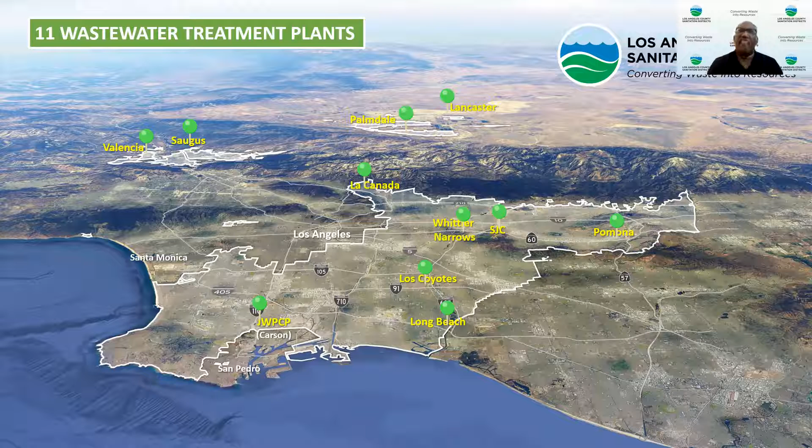And the two, Lancaster and Palmdale, are in the Antelope Valley, and they present unique challenges. There's the Palmdale plant that will be the focus of today's tour, and they present unique challenges, based on that they're in a closed basin. Of our 11 wastewater treatment plants, 9 of them, when they're done cleaning their water, if it's not reused, they have a river body, they have a water body, either a river or an ocean that they can discharge to.

The two plants in the Antelope Valley are located at Lancaster and Palmdale. If you look at this aerial shot, you can see the contours of the mountains. All the water from these two treatment plants flows to the northeast towards Edwards Air Force Base, and there's no river, there's no ocean there. So every drop that comes into those treatment plants, unlike the other nine we have further south in LA County, we have to manage on land.

For example, if we have water at our Los Coyotes plant, there's Whittier Narrows, a water body close by, so we can put the water there. But with Lancaster and Palmdale, every drop that comes in, we have to manage it on land. That makes for a unique challenge.

So even in the winter months, where it may be raining and reuse isn't as high, we have to have some place where that water can be properly stored and managed.

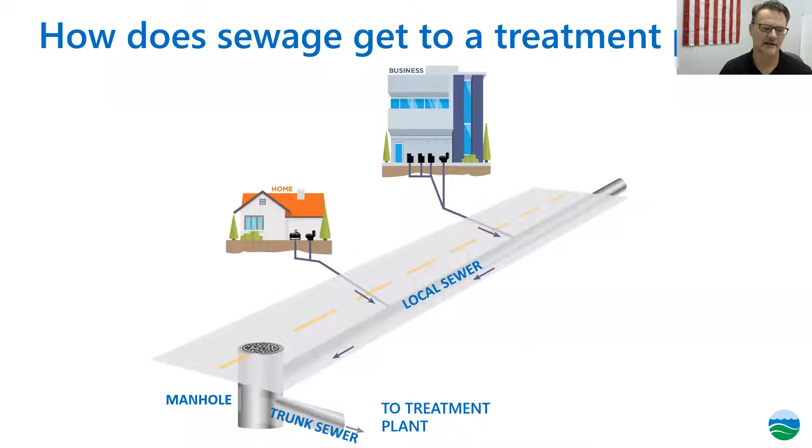The Palmdale Water Reclamation Plant was formed in 1953 and first started treating 0.75 MGD of flow, with about 4,000 customers at that time. To give you an idea what an MGD is, it stands for one million gallons per day. Think about 140 garden hoses flowing at once - that's a single MGD. Today, the Palmdale Water Reclamation Plant treats an average of about 10 MGD a day.

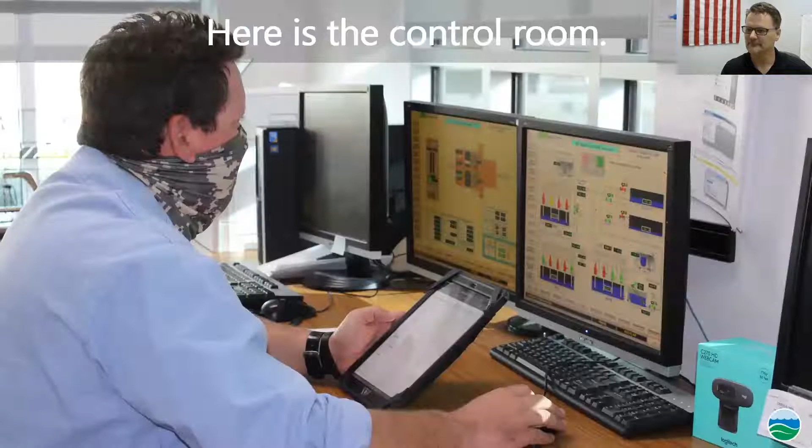Of course we had to have several upgrades throughout the years to get to this point. As you saw in the video, the plant is somewhat isolated off by itself, which is nice, and you can get an overview of the plant. In this picture here, you can see an operator looking at a couple of screens in our operations control room.

On those screens, you see different colors, green and red. This system is a DCS system, which stands for Distributed Control System. An operator can control pumps, valves, and processes just by clicking and changing things.

Jumping back to the colors on the screen, a green color means it's on - so if it's a pump, it's on, or if it's a valve, it's open. If it's red, that means the pump is off or the valve is closed.

This information helps as a cost savings approach, because now an operator can sit and control many different functions across the plant just from this one location. That doesn't mean an operator doesn't have to go out into the plant and observe and make adjustments - that does occur, but this helps with the control of the plant itself.

In his hand you can see an iPad, which is what we use for what we call electronic rounds keeping. Every day an operator will go into the plant and walk around on a prescribed route, recording information as they go through the plant.

This information tells the operator if something's changed - maybe a temperature of a particular pump has increased, giving an indication that there may be a failure on the horizon. If that's the case, we get maintenance involved and they repair it. It's a way of maintaining the plant to keep it working optimally.

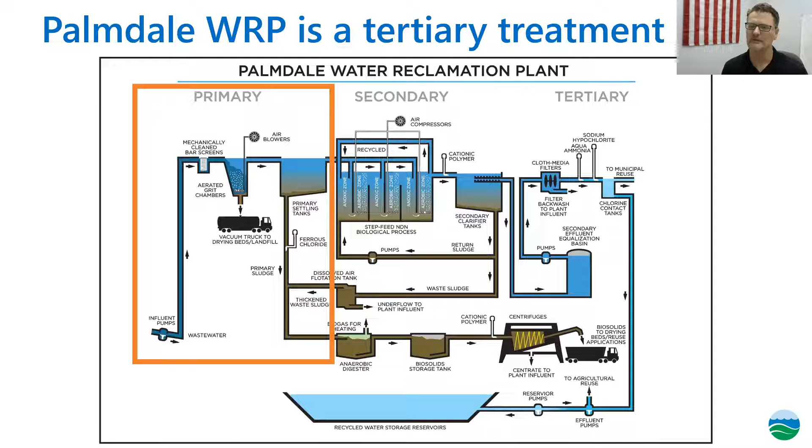Because we convey it via gravity, the pipes have to slope downward towards the plant so the water will flow downhill. The water enters the plant at about 30 feet below grade, and then we pump it above grade and start the treatment process.

The Palmdale Water Reclamation Plant processes an average of 10 mgd of flow, and we have 5 pumps even though each can flow 10 mgd - this is for redundancy reasons. That way, if a pump goes out, we can just pull it out and continue operations without any problems.

You'll see throughout the plant that we have these redundant systems, so if we have to do maintenance work or something breaks, we have redundancy to continue to treat and manage the systems.

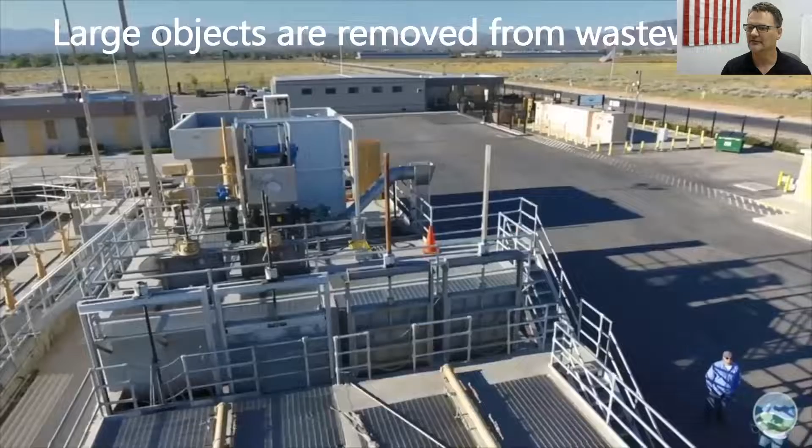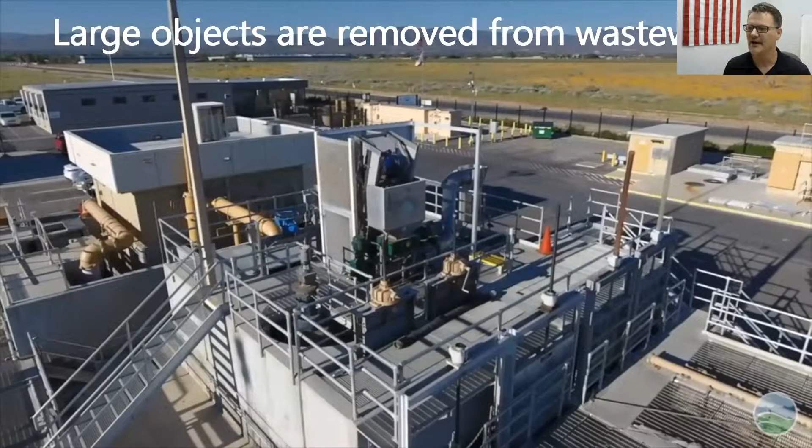Next is the screen structure. The water is pumped up to the screening structure, and this is the first step of physical separation. Anything over about 1 inch in diameter is separated out, and we start removing these through this flex rake system.

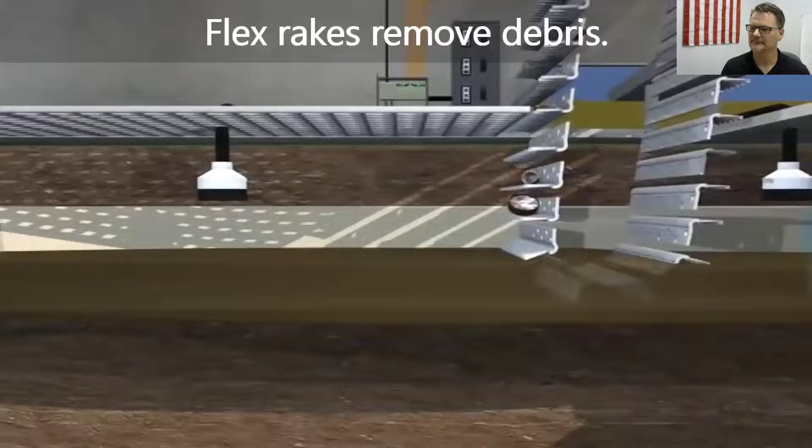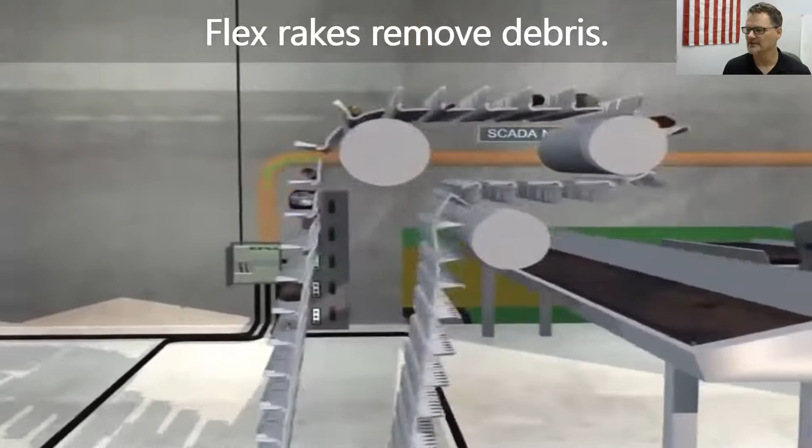Here's a graphic showing what it looks like from the side view. You can see the debris flowing from left to right on the screen. The screen catches it, brings it up, and in this graphic drops it onto a conveyor belt. Here at Palmdale we actually drop it into a washer compactor, which washes it down, grinds it up, and pushes it out to the side.

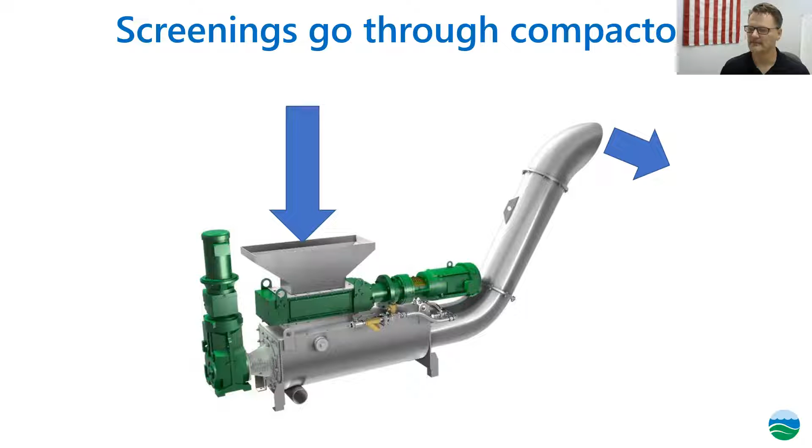So what happens with these flushable wipes, because they don't break down, is that they come into our influent pumps, they clog up our pumps, and then we got to pull these pumps out and rebuild them. So that's an extra cost on the plant itself. So if you have any flushable wipes, the best way to dispose of them is to throw them away. Maybe you have a baby at home and you're changing diapers. We all like to use the flushable wipes with the baby diapers to clean the baby because it works real well. Maybe throw it into, I think they have diaper genies now that you can throw it into. So that's how you want to dispose of them. You don't want to flush them down.

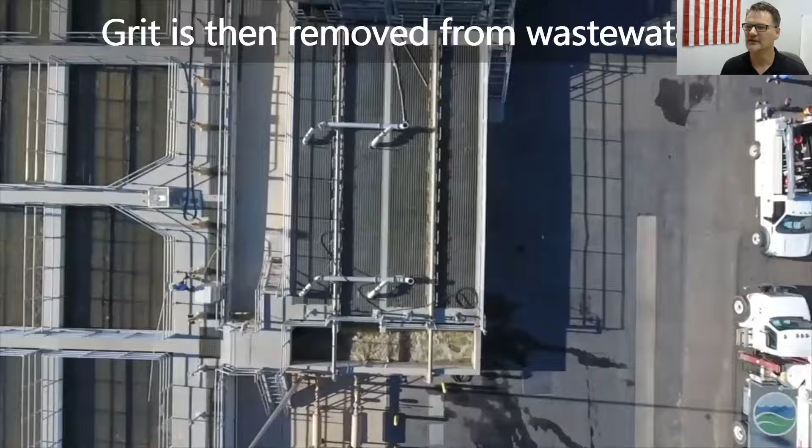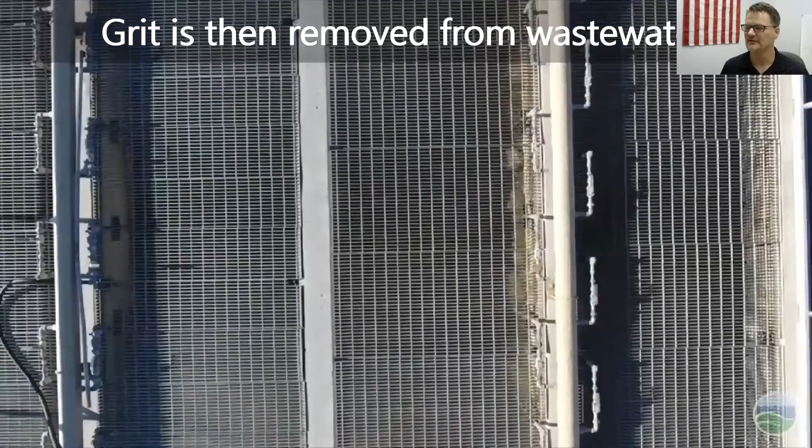All right, so we'll go ahead and move on with the tour. Next is our grit chamber. The purpose of the grit chamber is to remove exactly what it says. We want to remove grit. We want to remove these smaller, heavier objects, eggshells also. The reason why we remove these items is because we want to protect downstream equipment. The analogy I like to use is like, if you have a bicycle and a bicycle chain, you don't put sand in your bicycle chain because that will wear out your chain and sprocket. Just like we want to protect our chain and sprocket while we ride our bikes, we want to protect our equipment here at the plant. So we want to remove all that grit earlier on in the process if possible.

Also, I want to point out, if you look at the water here, it's very dark, and sometimes I hear the word yucky when we do the physical tours. I want to point out that it's not the water that's bad, it's what's in the water that's bad. These processes are designed to remove what's in the water so that we can recover the water and use that valuable resource in other areas or for beneficial reuse. So it's not the water that's bad, it's what's in the water. Once we remove what's bad in the water, we have good water remaining. And we're going to show you that at the end of the tour.

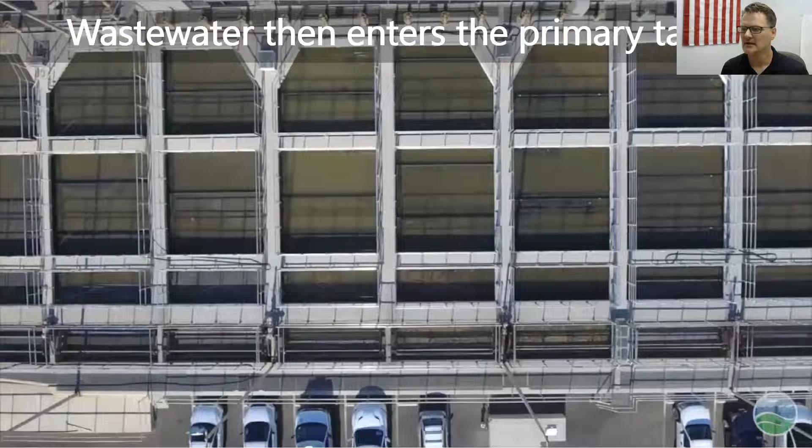All right, here's a video of the primary settling tanks. The purpose of the primary settling tanks is, again, physical separation. It's to remove anything that may float and anything that may sink in the tank itself. Looking on the top of the tanks, you can see these boards here. These boards slowly go across the water and collect everything that floats in the tank. These boards also go underneath the tank and collect everything that settles. Everything collected on top and on the bottom is then pumped to the digesters, which we're going to show you in this tour as well. Now this water slows way down, to allow opportunity for these items to float and sink so we can remove them.

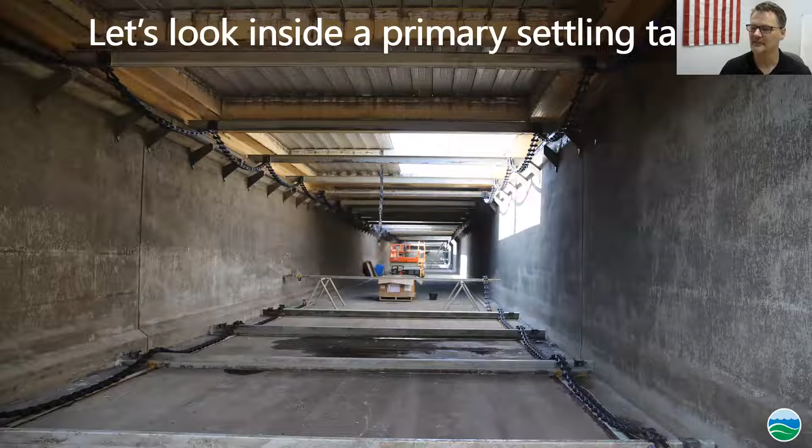And so this is what it looks like inside the primary settling tanks. On the bottom here, you can see the chain and flight system, these boards, and on the top also you can see them. They just kind of rotate around and collect this material.

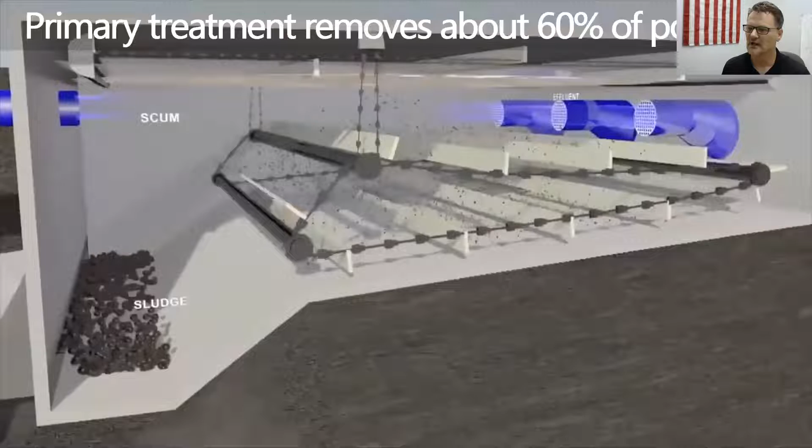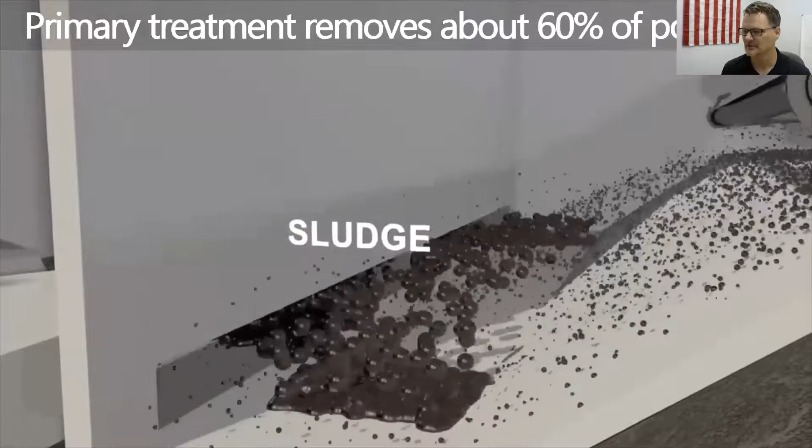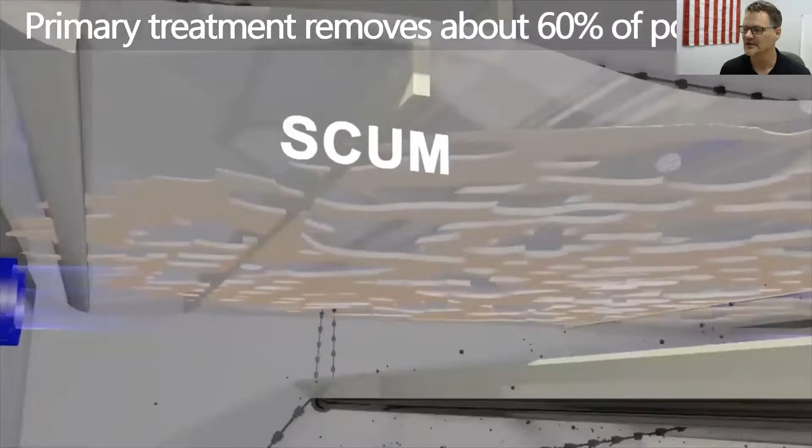And here's a graphic of the primary settling tanks. On the left-hand side, you see where sludge is collected on the bottom. Sludge is a term we use for all the material that we collect that floats and that sinks, or actually scum, I think, is what we use on the top. And so this material is then transported to the digesters for further processing.

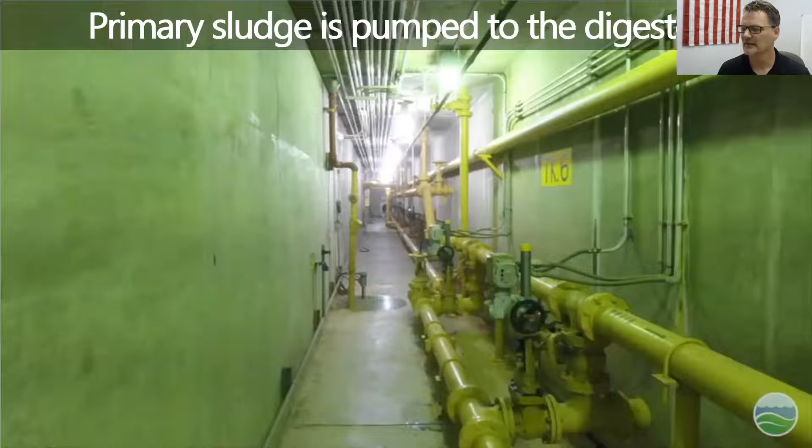Here's a picture of our primary galleries. On the right-hand side, you can see tank 6 here, that's settling tank number 6 that's been identified. We have some pipes here that go into the wall itself. These pipes that go into the wall are actually at the bottom of the hoppers in the primary tanks, and they're collecting that material, which is then being pumped and transported to the digesters.

Okay, now that we finished the primary portion of the system, we're going to move on to the secondary system. Genesis, any questions that popped up when we were going through the primary systems?

Just if it operates 24/7? Oh yeah, yes, excellent question. Yes, the plant operates 24/7. So there's always wastewater that comes into the plant, and this flow does kind of vary a little bit. It goes up, it goes down. So you can imagine at night when everybody's sleeping, the flow goes down, and in the morning when everybody gets up and starts cooking, taking showers, the flow kind of goes up. During the day when everybody's at work, the flow goes down, and then when everybody comes home from work, the flow goes back up again. So you just see this diurnal movement throughout the day based off of human activity.

Now I'll throw this question out to the audience. What do you think our busiest day is, the most flow that we will see at the plant? What day of the year do you think that is? Does anybody want to take a guess? I'm looking at the chats. Someone, Ashley, says the Super Bowl during halftime. Someone else says New Year's Day. Someone says 4th of July.

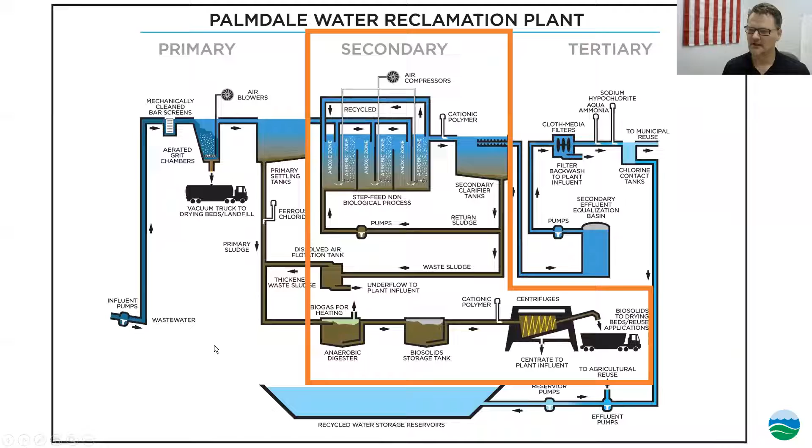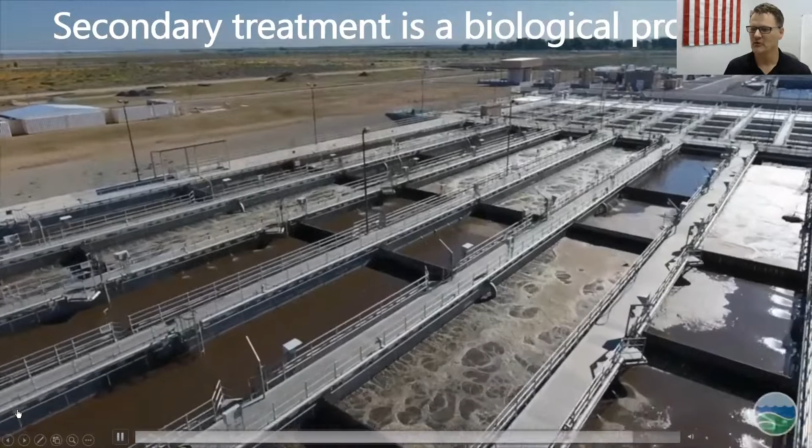So I'll move on. Now we're going to talk about the biological treatment. The biological treatment is considered the heart of the treatment plant itself. This is where a lot of important removal happens in the system itself, and I'm going to talk a little bit about this.

As you can see, there are aerated tanks and non-aerated tanks. The reason for this is that Palmdale has what they call an NDN process, a nitrification denitrification process, where we aerate some tanks and some other tanks are non-aerated. They're anoxic tanks, and we're using this to convert ammonia to nitrite, then to nitrate, and then to nitrogen gas.

So we're basically eliminating the ammonia at this point. Ammonia is considered poisonous to the aquatic environment, so we want to remove that. We want to have clean water by the end of the process. By having aerated tanks and non-aerated tanks, this selects certain microbes to do certain work, the work that we want. We're basically manipulating the environment so these microbes do the work we want them to do.

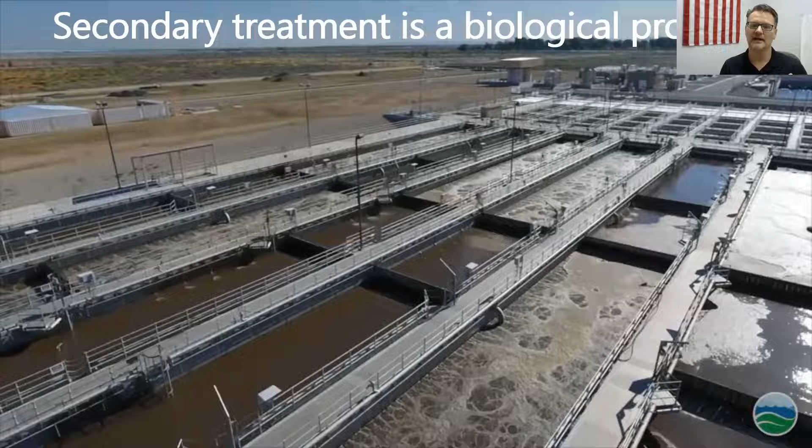Also, I want to point out that in the primary systems, we have done as much physical separation as we can. Now we have to employ microbes to remove the waste in the water, because the wastes are dissolved in the water. Think of it this way: if you had sugar mixed into your water, you're not going to be able to physically separate it out by letting it settle or float. It's just not going to happen, it's dissolved in the water.

With these wastes dissolved in the water, these microbes will go in and eat that waste for us. Later on, as I'll show you, we'll remove the microbes out of the water themselves. So they do a lot of work for us, and the operators have to do a lot of care and feeding of the microbes. They have to know what the concentration of microbes are, make sure they have enough air, and there's all sorts of things they have to do to care and feed the microbes to make sure they're working to their optimum in order to remove as much waste as we can.

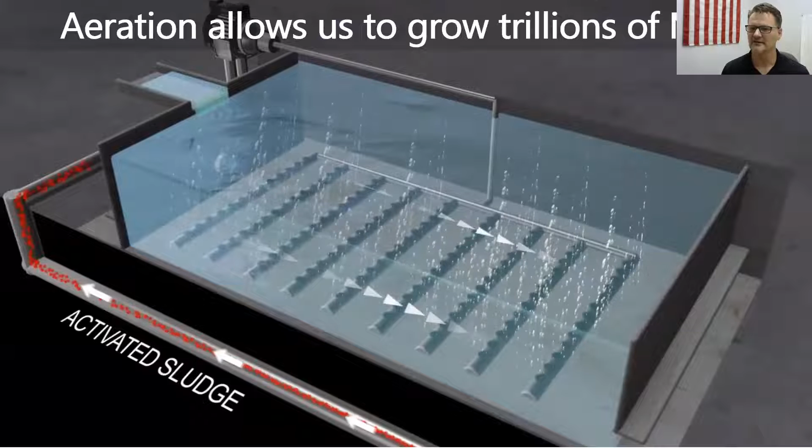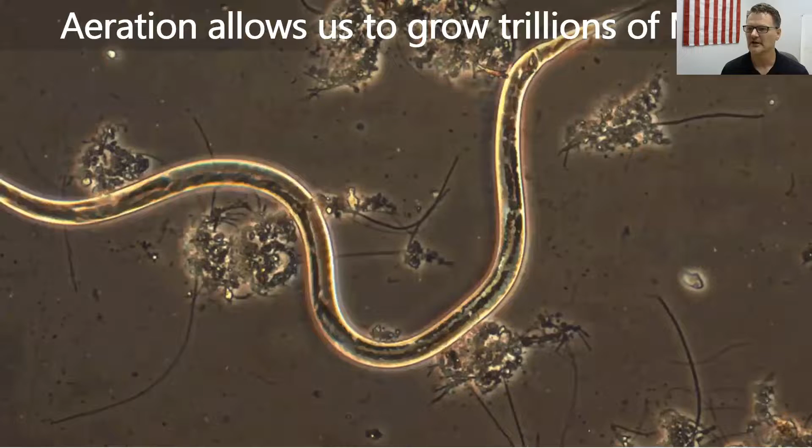So here's a graphic that kind of shows some aerated tanks here, and some activated sludge that's going into the aeration basin. I'll talk a little bit about the activated sludge here in a second when we go to the secondary systems. Here's the MOs, or microbes, microorganisms.

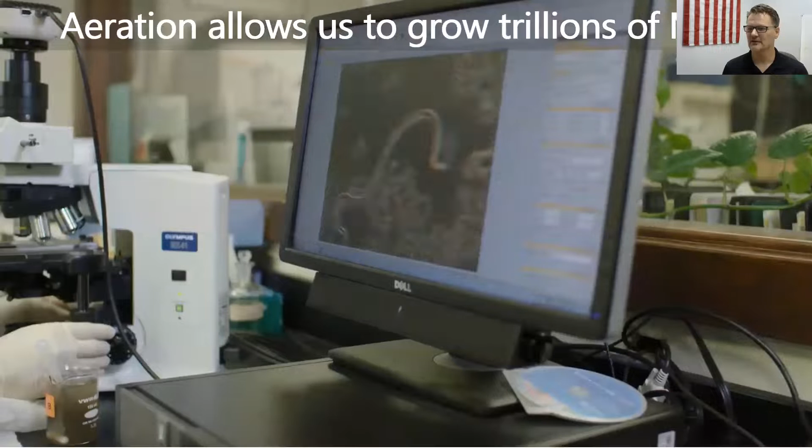We generally refer to them as bugs here at the plant. In this video, you can kind of see where a lab technician is looking at the microbes. Sometimes, not a lot here at the AV, but sometimes the plant will take samples of the microbes, and the lab personnel will look at them underneath the microscope to see what the health is of the microorganism environment.

So what we want to do is have a variety of microbes. We don't want just to have one microbe, we want a big variety of them. The analogy I like to use is if we were all going to a buffet, right? Think of a buffet with all sorts of different foods, and there's several of us going to this buffet. Not everybody is going to eat or like the same kind of food. Somebody may go for the salad, somebody may go for the pizza, somebody may go for the fish, right?

So think of the buffet food as waste in comparison to the microbes as people in this buffet example. By having these diverse communities of microbes, they go in and eat all these different wastes that are in the waste stream and remove that waste for us. That's why we want to have a diverse group of microbes.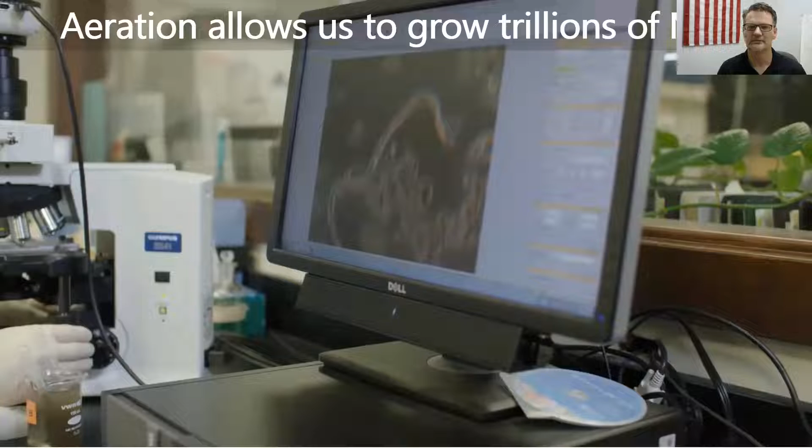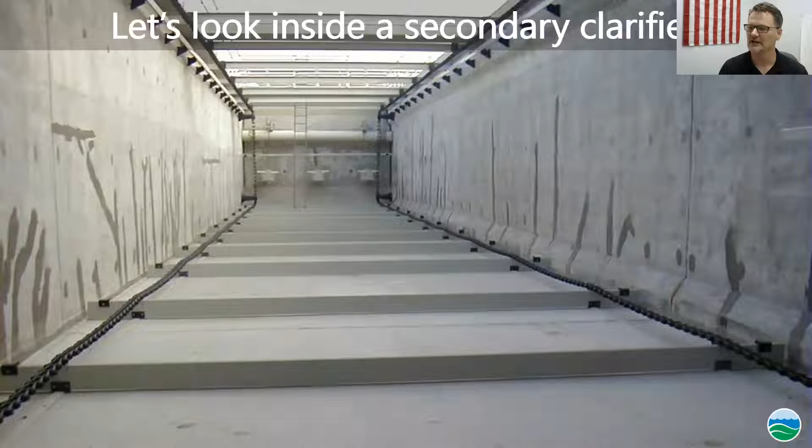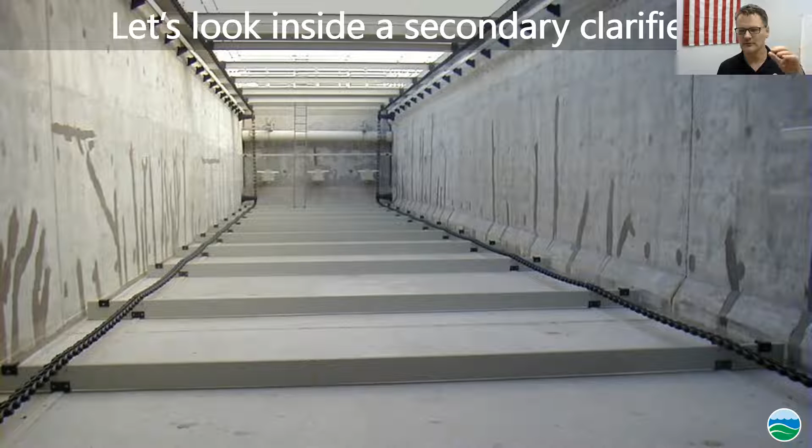All right, so next we're going to move on to the secondary settling tanks. Much like the primary settling tanks, the secondary settling tanks is a physical removal. You'll see this constructed very much the same way as a primary settling tank, and their purpose is to settle out the microbes. Luckily for us, the microbes are just a little bit heavier than water, so when they enter the secondary settling tanks, we settle them out.

This picture here, this is the end of the secondary settling tanks. You can see here, excuse me, we have this trough with these alligator looking teeth here. The reason why we have these alligator-like looking teeth is that we're trying to slowly scalp off the water from the tank itself.

We want this water to be as still as possible so that these microbes, which are just barely a little bit heavier than water, will settle out. Once we settle them out, we will either waste them, which is sent to the digesters, or we'll send them back to the biological process. I'll talk a little bit about that in a second.

But just even taking these steps here, you can see that we've done a pretty good job of cleaning the water. So I mentioned earlier that the microbes are collected at the secondary settling basin. They're actually sent to two different locations at that point, either to the biological tanks or over to the digesters, or first through a DAF, then through a digester. We're going to talk about that in a second.

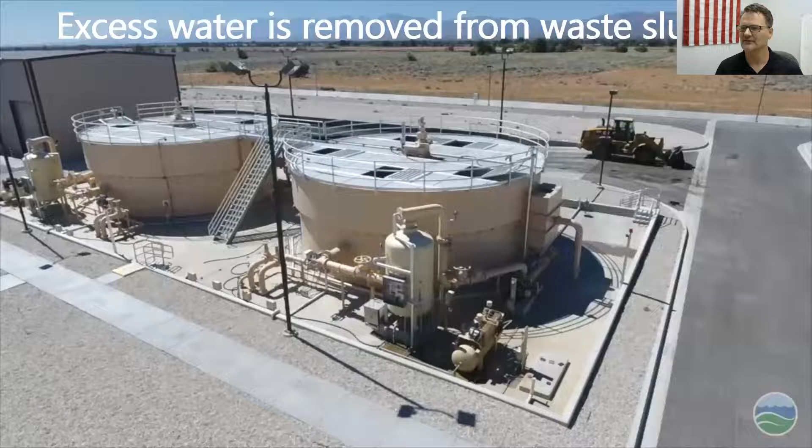All right, so I will next go to the DAF. This is the dissolved air flotation unit. So the microbes that we are wasting, or getting rid of, the excess microbes, are first sent to the DAF. The purpose of the DAF is to remove excess water before pumping those microbes over to the digesters for processing. We don't want to fill our digesters with water. We want to fill our digesters with microbes and sludge that we want to process and remove.

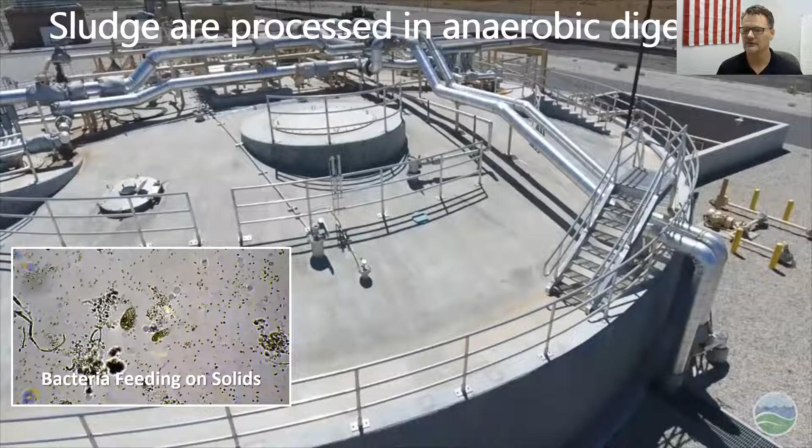Here's a picture of a digester, and on the lower left-hand screen, you can see the bacteria that are in the digester. These are anaerobic digesters, meaning without oxygen. We pump the waste that we collect from the primary tanks, and then the excess microbes from the secondary tanks, to the digesters. This is where we process it.

A digester is very much like your stomach. It's about 98 degrees, and it's anaerobic, meaning without oxygen. The material will sit in the digester for about 20 days, maybe a little bit longer, before we go on to the next process. It sits in there and digests, which is what it does.

I think we have a video showing it. Yep, there it is. You can see a lot of pipes on the digester, and they do different things. Some pipes provide steam to the digester to heat it. Some pipes collect the methane gas that is generated from the anaerobic digester.

That methane gas is considered a greenhouse gas, so we have to properly dispose of it, or beneficially reuse it. Here at Palmdale, we use the gas to heat the steam boilers, which in turn heat the digesters themselves. The excess gas that we have, we flare off, we burn it, we destruct it, we destroy it, and that way it doesn't affect the environment.

There's also pipes that pump in sludge and pump out sludge, and that's what they do. All right, so I'll go to the next slide.

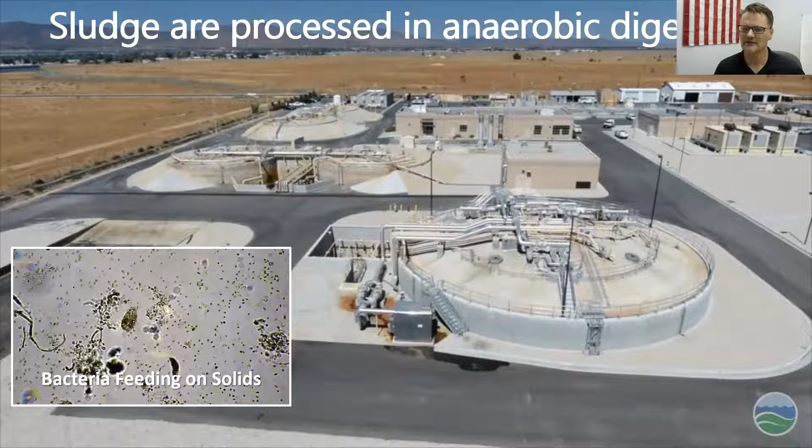The reason why we do it is twofold. The first reason is cost - we want to remove as much water as we can because it costs money to transport water off-site. We're going to transport these solids to a composting facility, which I'll show you in a second, and trucking costs can be expensive, so we want to remove the water. The second reason is that it also reduces the volume of the material - by removing that water, you remove the volume of the material itself.

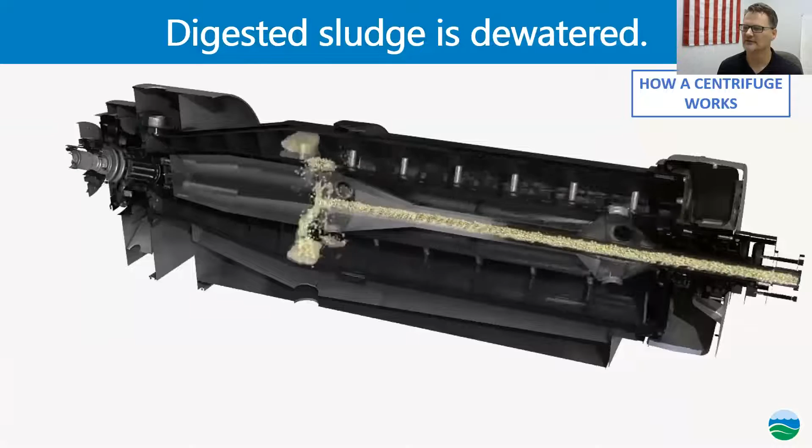I have a video here showing you how a centrifuge works. As you can see on the right, the material enters the centrifuge and it's spun out. The material is then pushed forward, and on the backside of that centrifuge you can see where the water is coming out. That water is called centrate, and it's put back into the beginning of the plant and goes through the treatment process again.

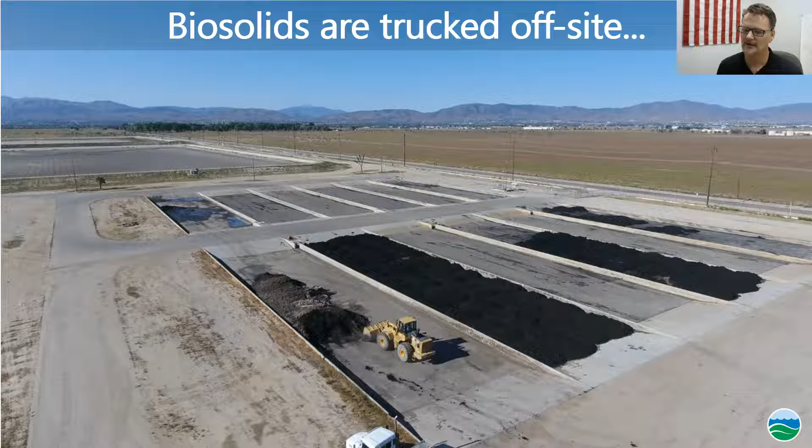Here's a picture of the 40th Street property, and this is where we store our biosolids before we transport it off-site to be beneficially reused. It's used for composting - we send it to a company called Synagro up in the desert, and they compost it, and that compost is then beneficially reused.

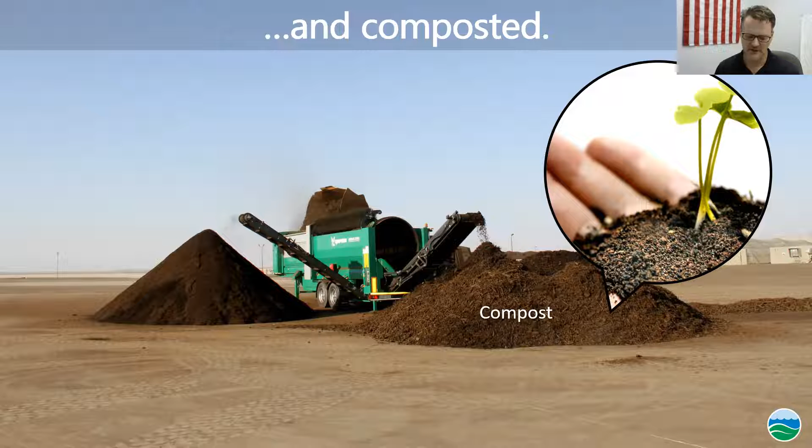Okay, so that completes the secondary systems. Next is the tertiary systems. So Genesis, are there any questions on the secondary systems before we move on?

What is the lifespan of the microorganisms? Oh, that kind of depends - maybe I can ask you this question, Teresa. Maybe you can help me out with this. Yeah, I'm gonna put you on the spot a little bit.

So we do have a way - we monitor the biological systems. We don't want the microbes to be too old, and we don't want them to be too young, so we kind of monitor how old or how young they are. There's actually a long, complicated math problem you have to do to figure it out. I'd say about 1 to 2 weeks average, but they're growing and proliferating constantly, so there's always bugs in there, but it's about a 2-week lifespan.

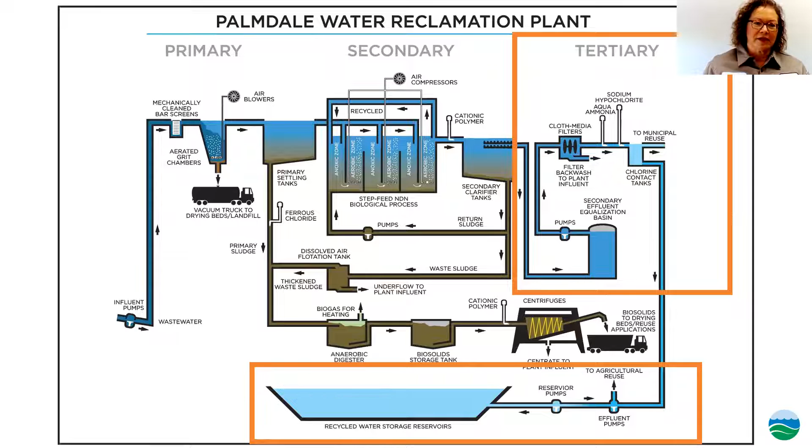And those are the microbes that we waste, right? That's how, yeah. So we calculate it - it's a long complicated math problem, like you were saying, Teresa. What is it, MCRT, right? MCRT, yeah, that's right. So not to get too in depth, but you calculate it based off of volume, your concentration, and how much you waste versus how much you recycle. All those pieces are put into a math formula which determines how old your microbes are. That was a good question.

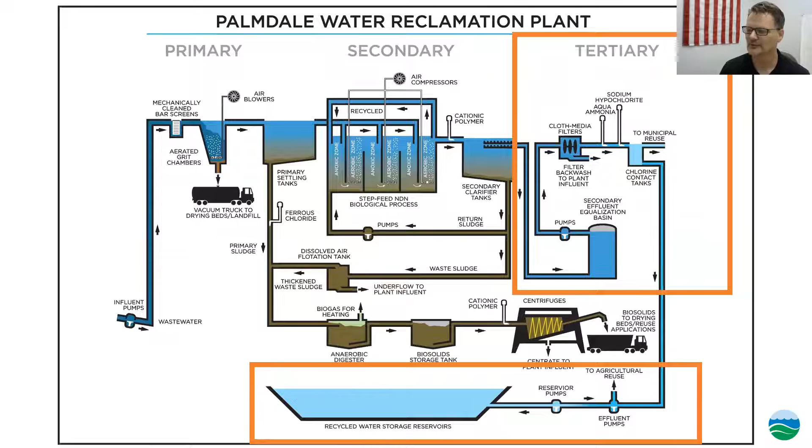We're going to talk about the tertiary system, and also the recycled water storage reservoirs. After the secondary settling basin, after the secondary settling tanks, we then go to the equalization tank, which is just after those settling tanks. This is kind of an overview of it - this tank is about 5 million gallons, can hold about 5 million gallons. There's actually a couple of purposes why we have this tank here.

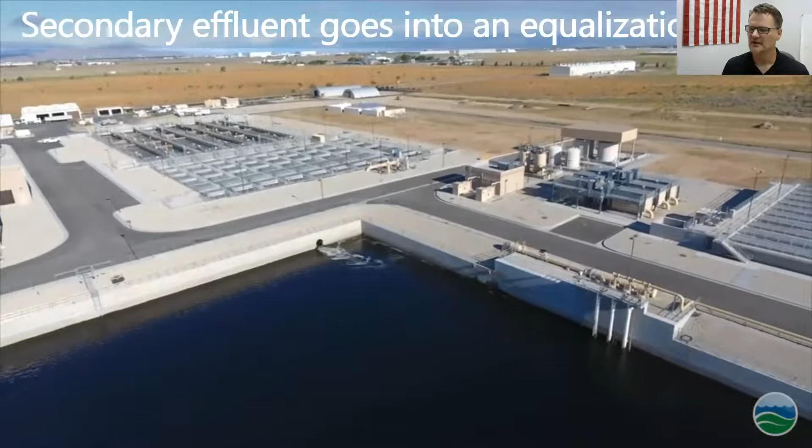You can see there's a lot of concrete and some pumps here - we spent money building this thing. The reason why we have it at this part of the plant is for two reasons. The first reason is for redundancy. As I mentioned earlier in the presentation, we have some redundant systems, and this is actually one of them. So if we have an issue at the end of the plant where we lose power or something breaks, or something catastrophic happens, we can store water in this tank for a period of time, buying us time to make the necessary repairs if we needed some.

The other reason we have it is for a cost saving measure. If you remember earlier, we talked about how the water flows up and down throughout the day, and even throughout the year it goes up and down. So what this does is allow us to store water in this tank, and then we can have a steady outflow of an average of 10 mgd that then goes to the remaining treatment processes in the plant. And so when we add chemicals to the plant...

When we do the tertiary treatment, we add hypochlorite and ammonia to form chloramines. Operators must maintain a certain residual in the water, so if the flow is fluctuating, they're always chasing it, adding a safety factor to avoid violating permit requirements. That means adding a bit more chemical than needed. But with a steady flow, the operator can narrow in on the chemical requirements and maintain it more steadily. It's an easier way of operating since you can set it and monitor it rather than constantly adjusting. That's another reason we have that secondary equalization basin at that point.

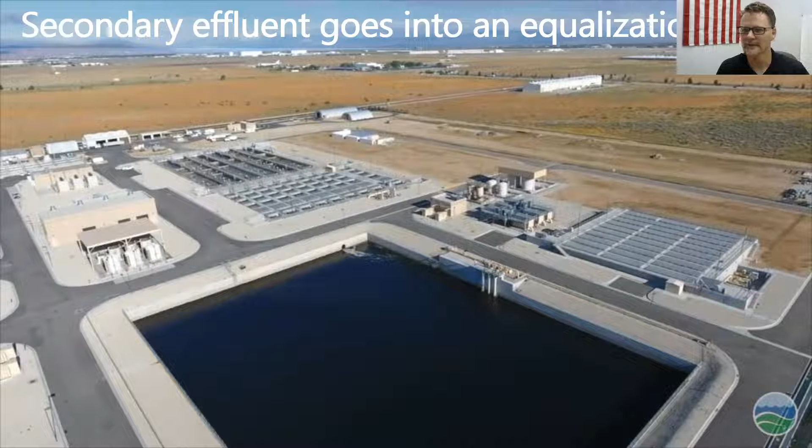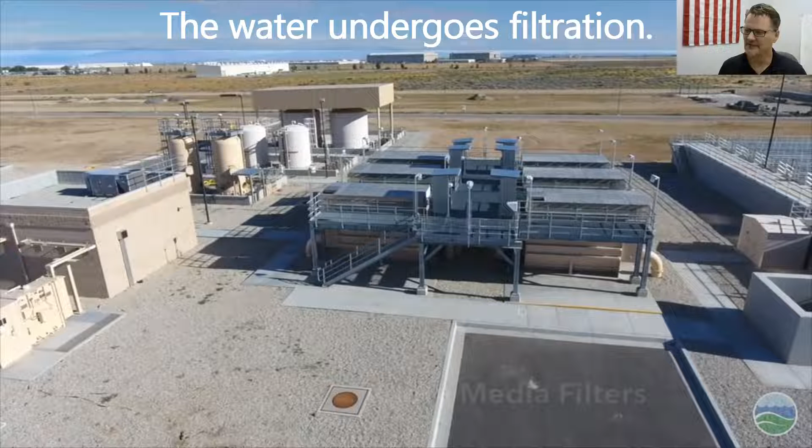After the secondary equalization tank, we move to the filtration process. This is a photograph of the filtration tanks. We have six tanks, as you can see here, and we'll take a closer look.

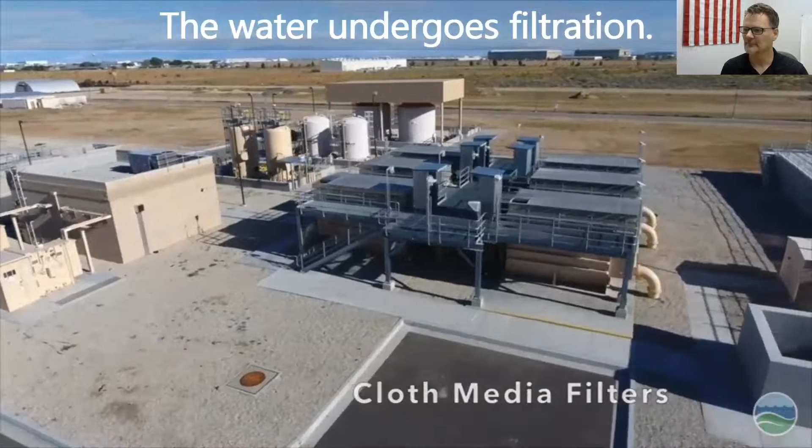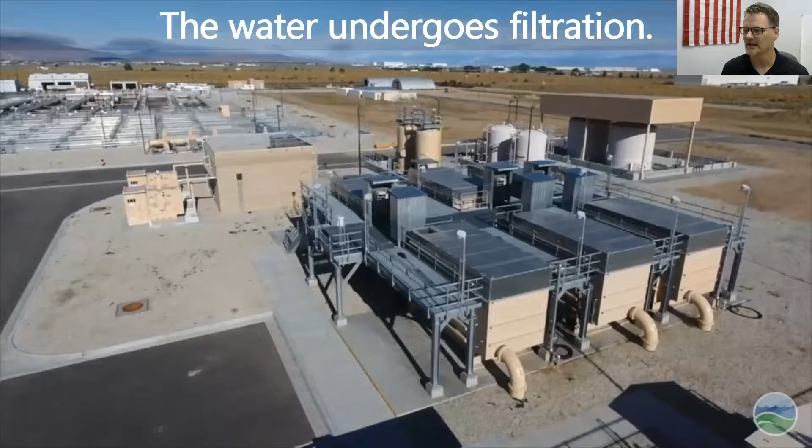We use cloth media here. At Lancaster, we use a gravity filter, and as I mentioned earlier, there are many different ways of doing the same thing. Here we use a cloth filter, which we'll talk more about. Here are some pipes underneath the filter itself, which we'll show you in a second.

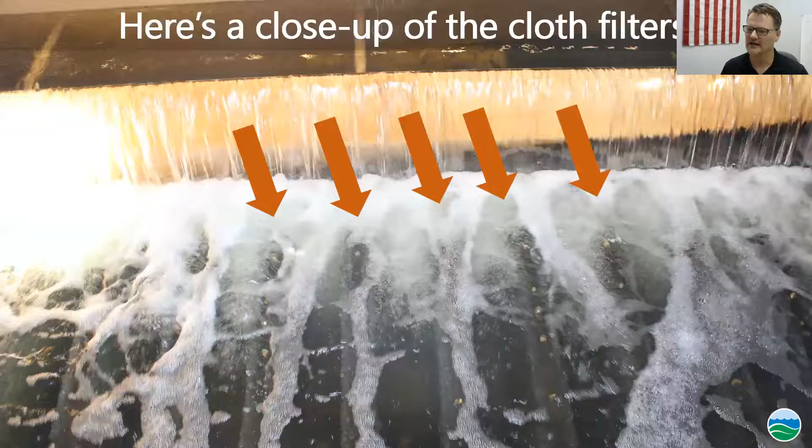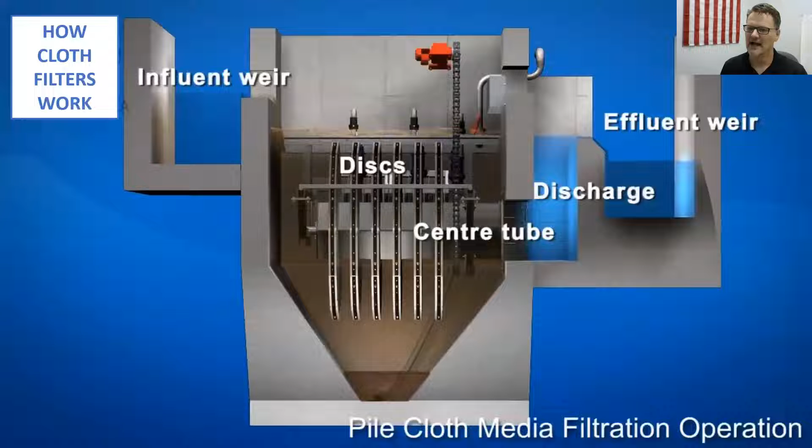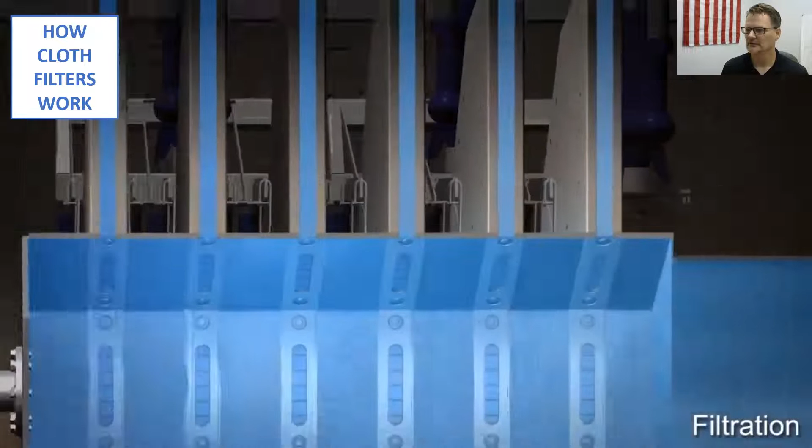We're going to open up the filter so you can look inside. Here's a close-up of the cloth filters with water in them—you can see the water cascading down onto the filter. In this video, you can see the water fill up, then gravity flows down through the filter and into the center of the pipe, then flows out from there.

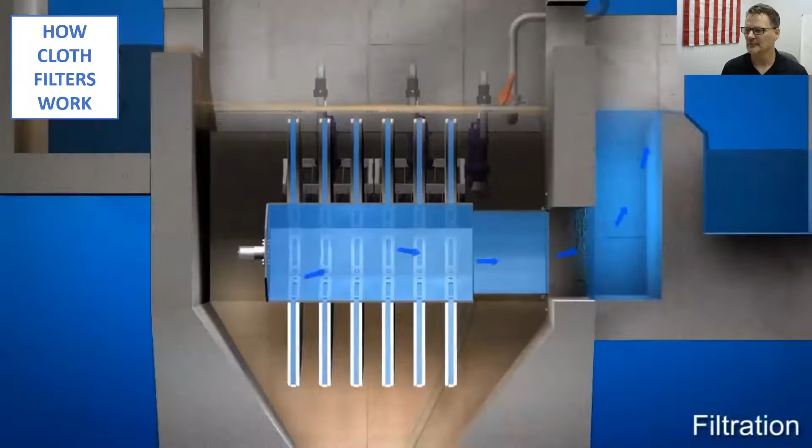Here's a close-up of the filters without water, so you can see them better. These are assembled via wedges—separate pie-shaped wedges that form the circle.

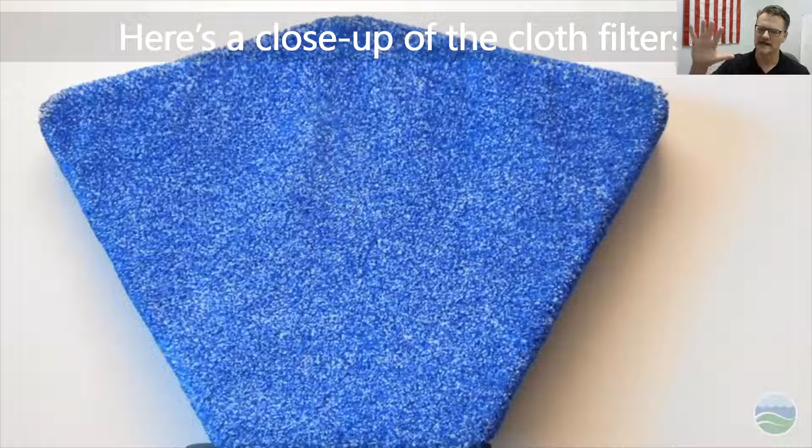Here is an example of a wedge itself. Just to give you an idea, it's very much like carpeting—if you run your hand along it, it feels very much like carpet. We have an example here at the plant, so during a physical tour we bring it out and you can rub your hands on it to get an idea of what it feels like.

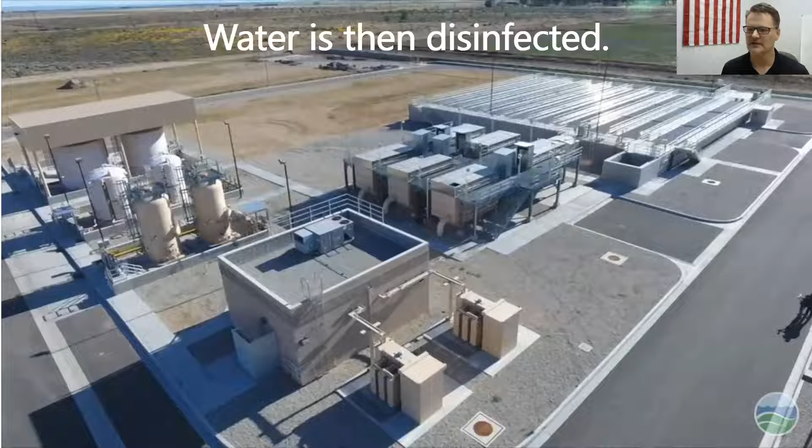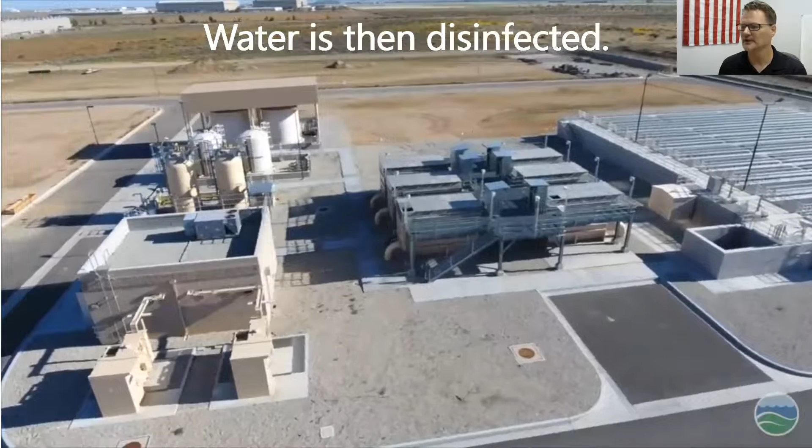Next, we go to the disinfection process, the chlorination tanks. As I mentioned earlier, we disinfect using hypochlorite, which is bleach, and ammonia. We combine those two chemicals to form chloramines, a persistent disinfectant we use here at the plant. We have a steady flow coming in, so we're able to narrow in on what we need to apply. These chemicals spend about 4 hours of contact time roughly in these tanks.

As you can see, we have covers over these tanks, while our other processes don't have covers. I mention this during tours because it's an important cost-saving measure—we spend money to build these covers. So I want to ask: why do you think we have covers on these tanks but not in other locations? Why would we have them here?

I know you know—if somebody has a pool at home, I bet they know. Okay, someone says high winds, gases. Susan says to prevent evaporation. Yep, and chemicals could be toxic or stuff could fall in. All good answers. Wait, one more: to prevent bacteria growth.

That's it. Yeah, that's not a bad answer either.

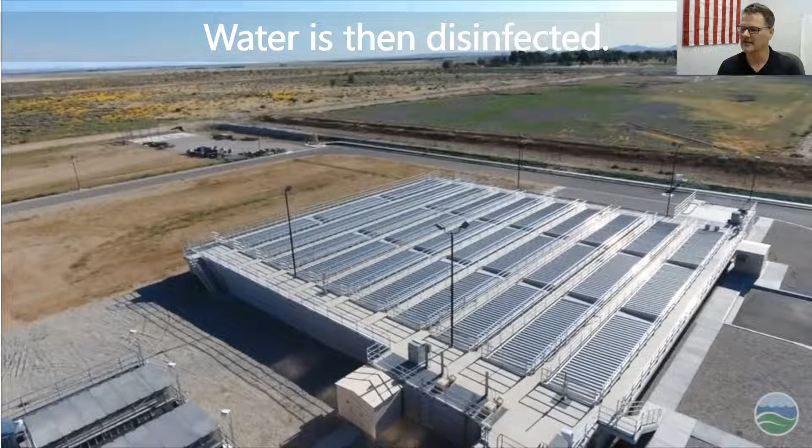Okay, so here's another viewpoint, and here's the water itself as it's coming out. You can see how clean it is. Now, if you were standing here for the physical tour, it would smell very much like a pool. You get that strong chlorine smell because we've been disinfecting the water at this point.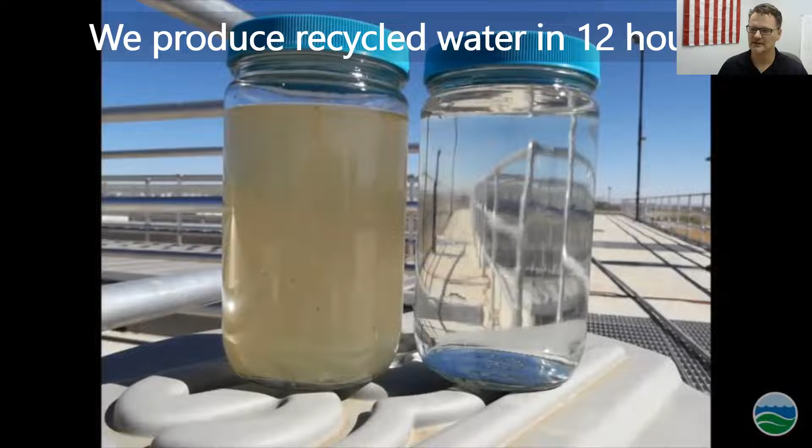These reservoirs are filled and depleted throughout the year. During the wintertime, when water demand is low, these reservoirs will fill up. During the summertime, when demand is high, we'll draw from the reservoirs and empty them out.

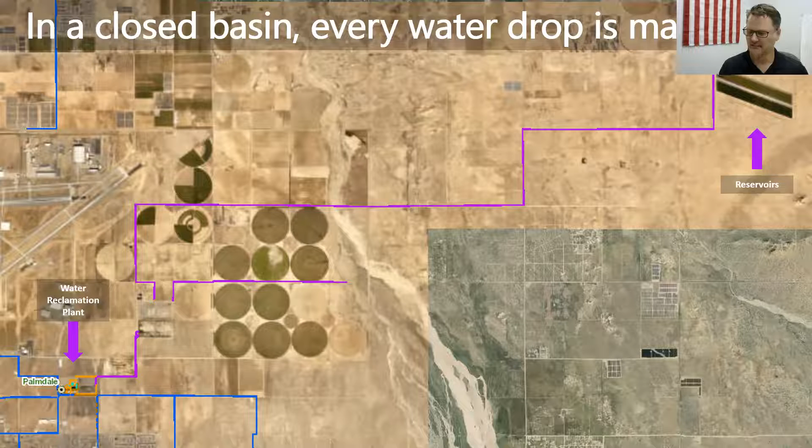Just to touch on the engineering of this, you have to design the system, thinking about the amount of water coming in, the demand going out, and how big the reservoirs need to be. It's also a very sandy environment out here in the desert, so constructing them means thinking about materials and methods to make sure everything is built correctly. There was a lot of work that went into it, and we were able to build these reservoirs through all those processes.

Next, moving on, this is where we use our recycled water for irrigation, agricultural irrigation. We irrigate about 2,000 acres of farmland used for fodder crops, basically used for feeding animals rather than growing food that people eat directly, but maybe farm animals we eat. So crops like alfalfa are what will grow.

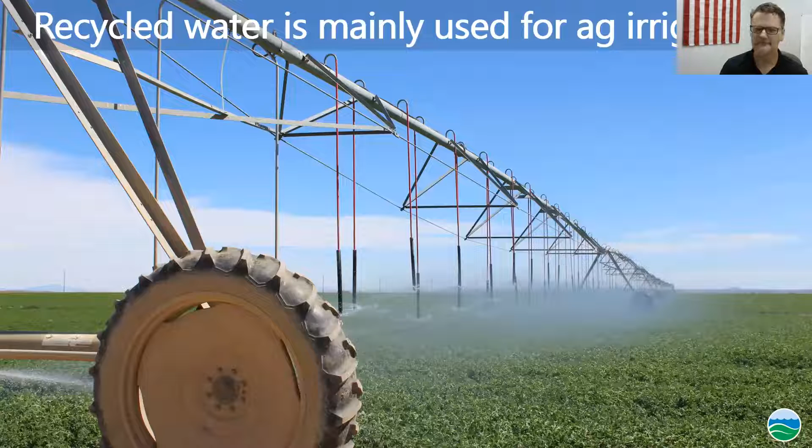We also send water to McAdam Park here in Palmdale, and we beneficially reuse the water that way to keep our grass green. We can play sports, things like that. I'd like to point out that the reclaimed water is safe for human interaction because we've disinfected it properly at the plant, so we can beneficially reuse that water. I think that's it.